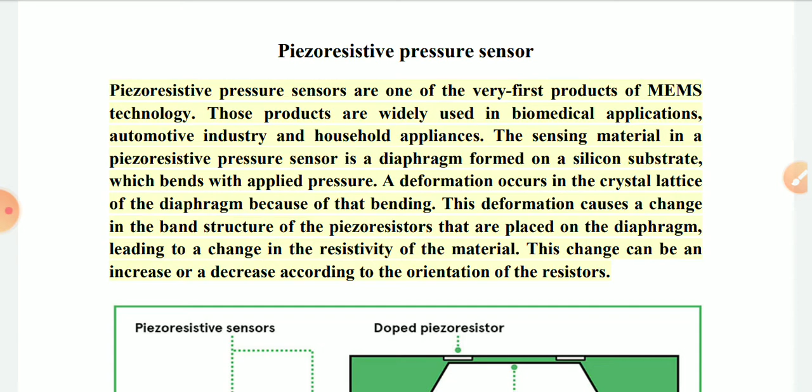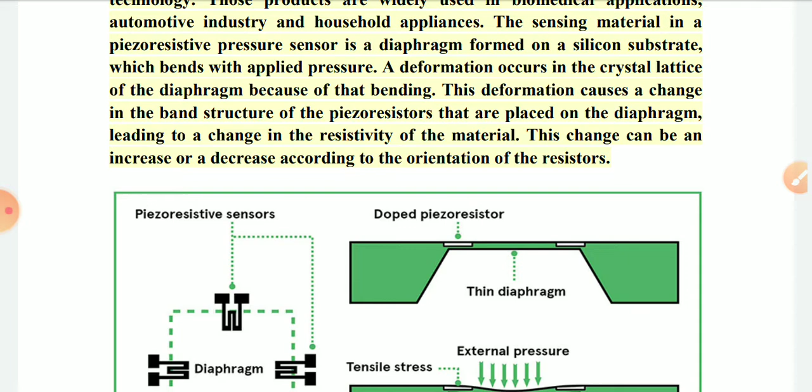The sensing material in a piezoresistive pressure sensor is a diaphragm formed on a silicon substrate, which bends with applied pressure. You can see here the diagram. When force is applied, it bends downward.

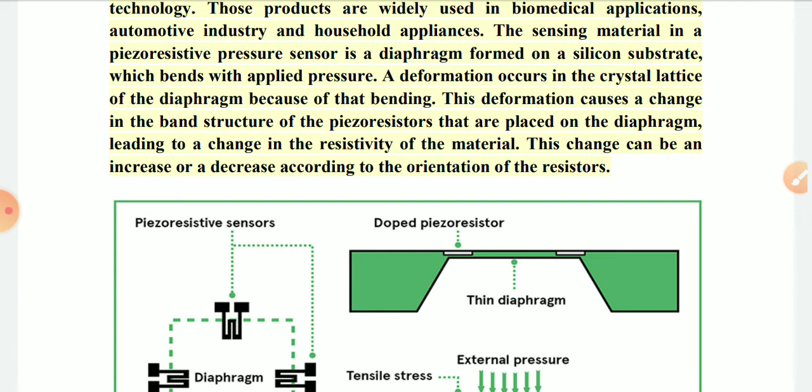A deformation occurs in the crystal lattice of the diaphragm because of the bending. This deformation causes a change in the band structure of the piezoresistors placed on the diaphragm, leading to a change in the resistivity of the material. The change can be an increase or decrease according to orientation of the resistors.

The change in resistance in this sensor is usually sensed using a Wheatstone bridge circuit. If you want to use a Wheatstone bridge for sensing the resistance change in terms of voltage, you have to make a bridge.

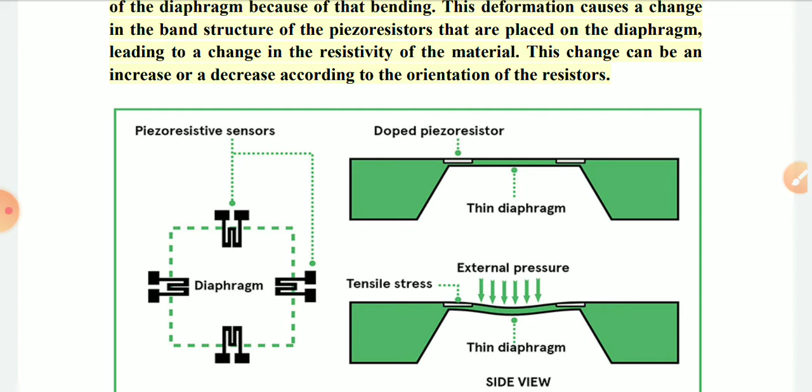But with a small change in mechanical energy, you want a large amount of output from the Wheatstone bridge. In order to achieve that, the location of the piezoresistors is a very important aspect—where we have placed the resistors. Here in the diagram you can see how they are placed.

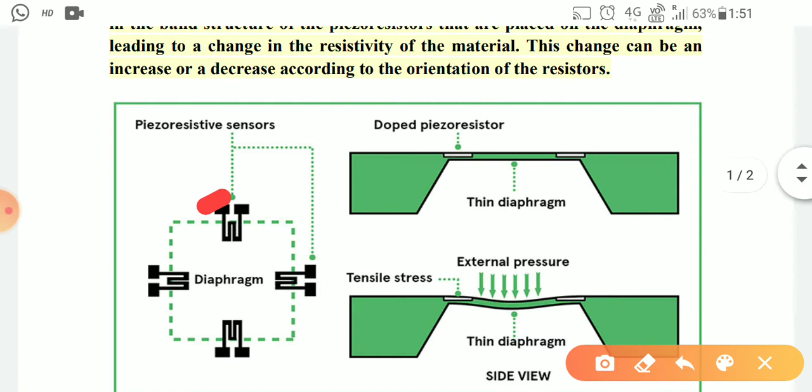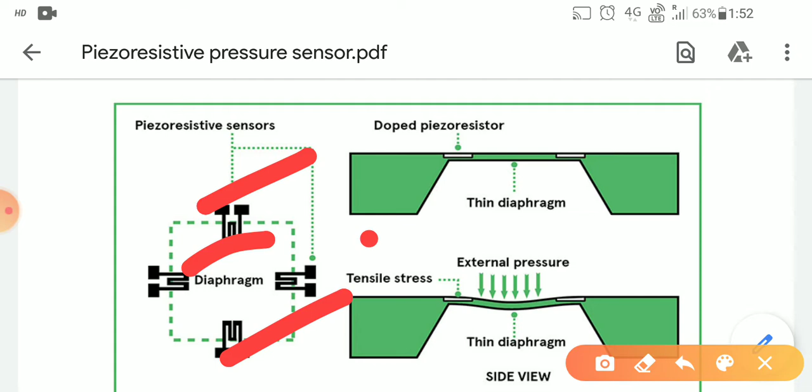I will mention how these four resistors are placed. Two piezoresistors are oriented so that they sense stress in the direction of their current flow. I consider these as R1 and R3, and this one is R2 and this one is R4.

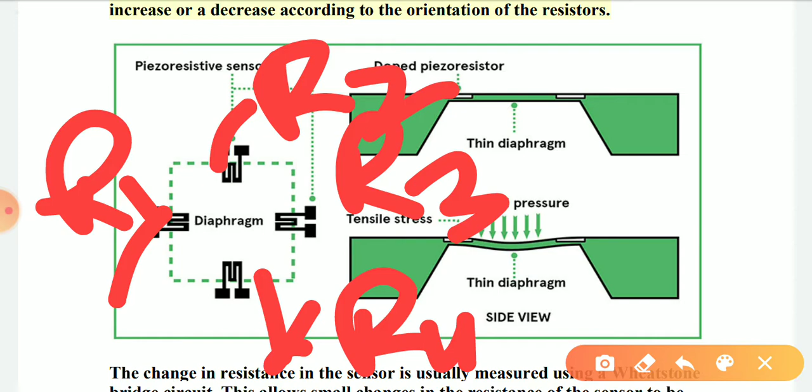Two are placed sensing stress perpendicular to the direction of current—R2 and R4 are perpendicular to the current flow. One pair will be along the direction of the current axis and the other two will be perpendicular to the direction of current flow, as shown with R1 and R3.

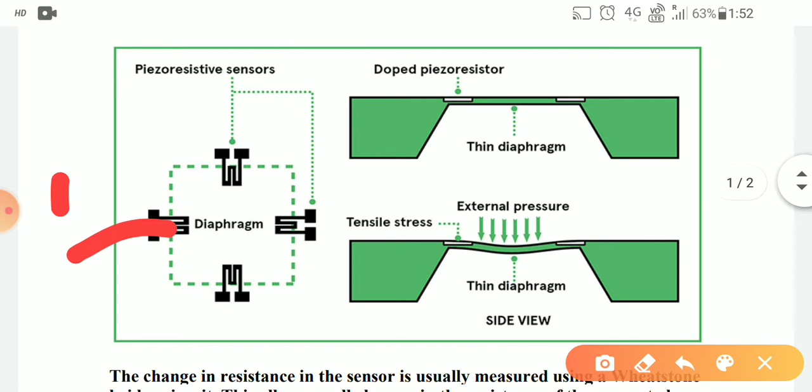R1 and R3 are parallel to the opposite edge. But R2 and R4 are perpendicular to the opposite edge.

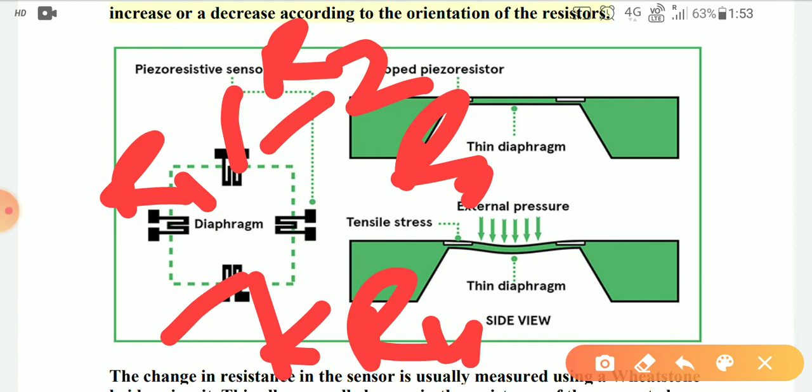So if there is a deformation on the beam when an external force is applied, the change for the parallel ones versus the perpendicular one will differ—the resistance change will be opposite.

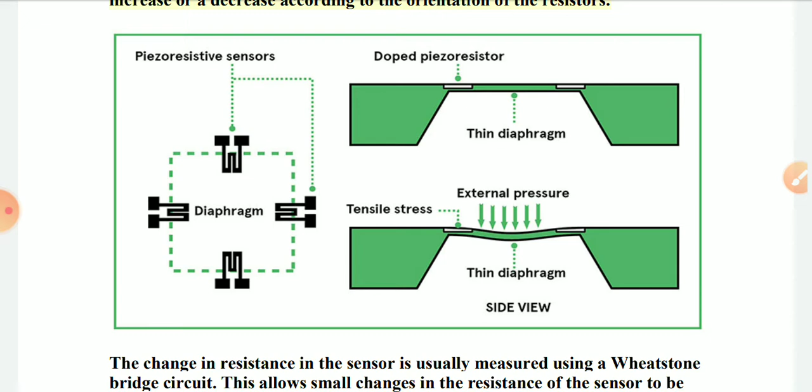In a membrane, two piezoresistors can be placed parallel to opposite edges of the membrane and two others perpendicular to the other two edges. If you apply pressure, the membrane shown here bends downward.

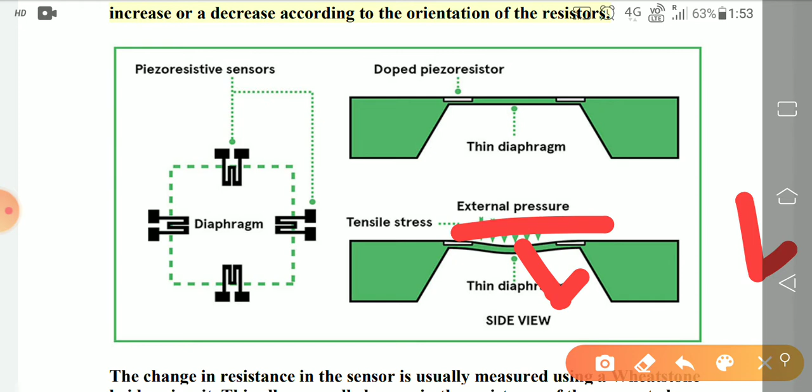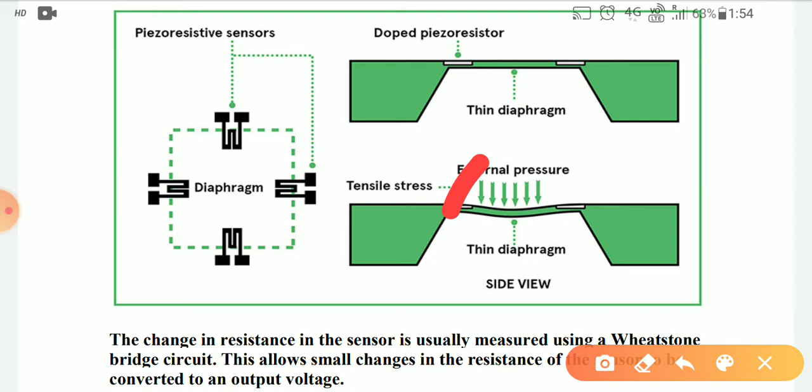This will cause tensile stress on the membrane. You can see here the tensile stress generated on the membrane surface at the edges—on all four edges, it will produce tensile stress.

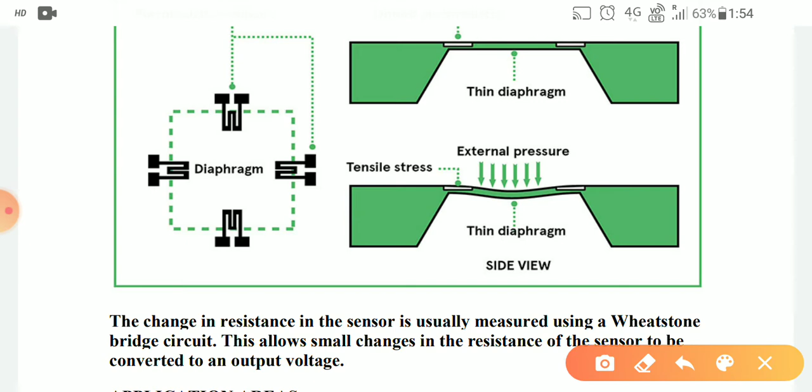The parallel resistors R1 and R3 are placed parallel to opposite edges. These parallel resistors are under lateral stress and show a decrease. Whereas the perpendicular resistors, R2 and R4, are under longitudinal stress and so show an increase.

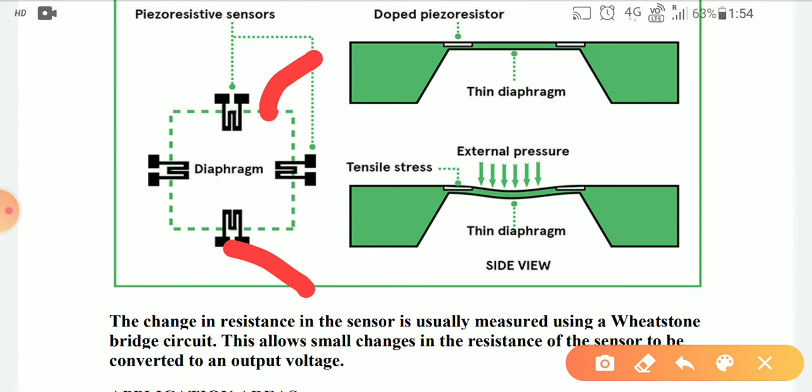So finally you will get a large amount of signal.

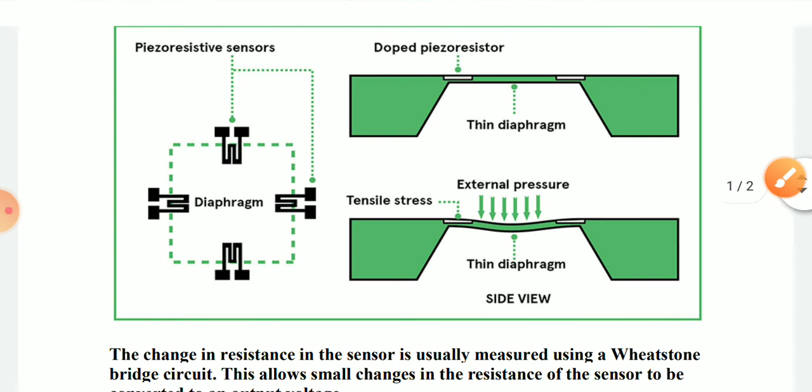Piezoresistor applications are many—used in washing machines, vacuum cleaners, automotive applications like oil level, gas level, and air pressure detection, and in biomedical applications such as blood pressure sensor measurement.